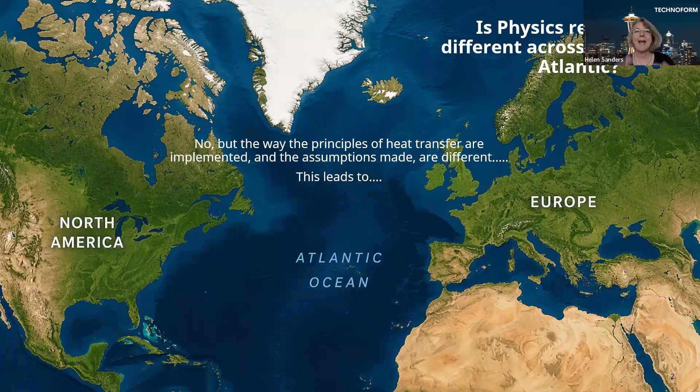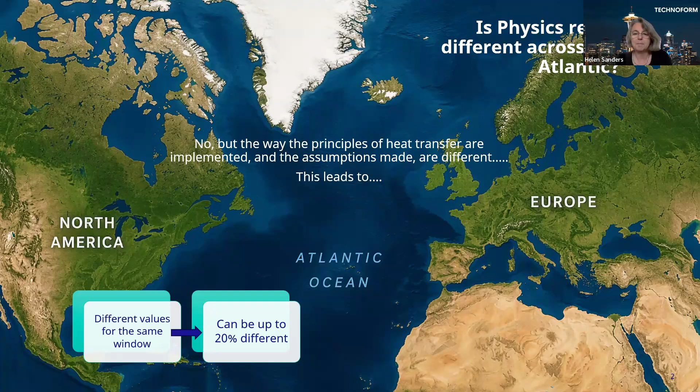But what we find is that the principles of heat transfer, how they're implemented, and the assumptions made are different in North America compared with Europe. And what this leads to is different values for U factor for the same window if calculated in European terms versus North American terms. And it can be up to a 20% difference. It's quite meaningful. And we actually find that there's no correlation between the North American U factors that we calculate and the European calculated U factors. So there's no quick rules of thumb.

So what I wanted to do here today is explain to you the reasons for the differences, then talk about some of the implications that arise from that. And then at the end, give you some rules of thumb, or questions to ask when faced with U factors for windows, so that you can really figure out whether you can do comparisons between windows or not.

So with that said, let's take a dive into why the U factors are different in Europe compared with North America. There's four main reasons. One is there's a different approach taken to doing the calculation. Secondly, the calculation methods are different. And then they use different boundary conditions, which I'll talk about in a moment. And then they have different window size assumptions.

So let's talk a little bit about the different approaches for the calculation of U factor. In North America, we're really just considering the assembly U factor. Most of the U factors we talk about are just the assembly U factor. It's standardized based on particular model sizes. The industry compares performance based on the assembly only, and that's our paradigm in North America. And it can be challenging for energy simulations, because you really want to use project-specific sizes for that, and we only generate U factors based on a model size.

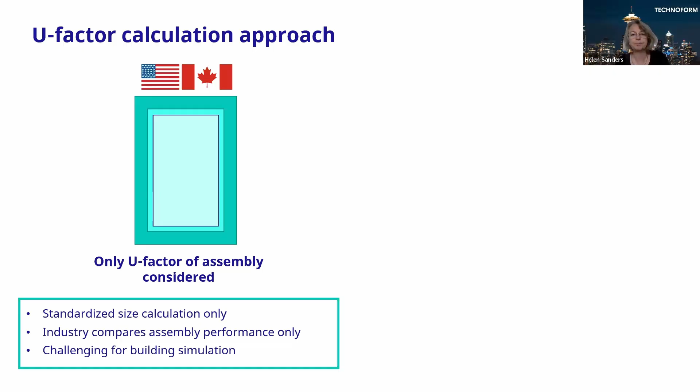In Europe, the situation is different. They calculate U factors for the frame separately from the center of glass, and they also calculate a performance for the edge as well. What that does is it allows you to calculate an overall assembly U factor as a function of the particular project size, and scale the performance for size.

Helen, sorry, I hate to stop you, but I'm being told there's an echo. Oh, I'm sorry, I don't know where it's coming from. I'm not hearing it. So is anybody else getting an echo here? No, I'm not hearing it on my end. It's clear to me. Amber, it says all of us are echoing. I don't hear it, so I don't know how to fix it. Sometimes Zoom decides to use two speakers instead of only one. So maybe look in the audio button on the left, Amber. It'll probably tell you which speakers are being used. Yeah, let's see here. Do you want me to try something? Okay, Vito says it stopped. So it was more than one. Amber, how about yours? Is it still?

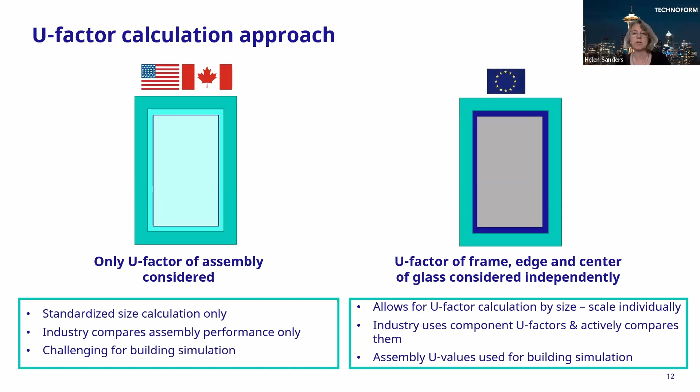So just to dig in a little bit, the North American U factor is calculated by an area weighting. You calculate a frame U factor, multiply it by the area of the frame, then add it to an edge of glass U factor multiplied by the edge of glass area. That edge of glass area is defined as a 2.5-inch strip around the perimeter of the window just inside the sight line. Then you add the center of glass U factor multiplied by the center of glass area, which is basically the glass area minus that perimeter edge of glass area.

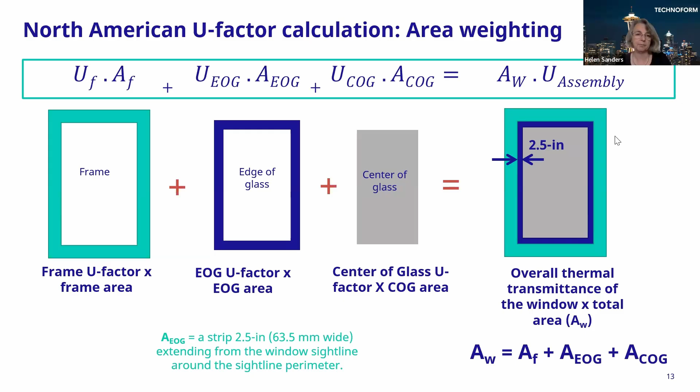Once you do that, the sum is equal to the U factor of the assembly multiplied by its area, and then you get your U factor. It's simple. The European calculation is a little different.

Instead of an edge of glass U factor, it uses this concept called linear thermal transmittance, or psi value, where it assigns a thermal bridge value, linear thermal transmittance, to the conductance caused by the glass-frame interface. It doesn't assign an area to that, it's just a linear length. So it's basically this linear transmittance multiplied by the interface length of glass to frame, and that gives you the transmittance caused by the edge of glass.

The frame U factor times the frame area, the center of glass multiplied by the full glass area. Then you add all that together and it gets you the overall transmittance of the window. So it's a little different calculation, and that little difference actually gives rise to some big differences in the outcome.

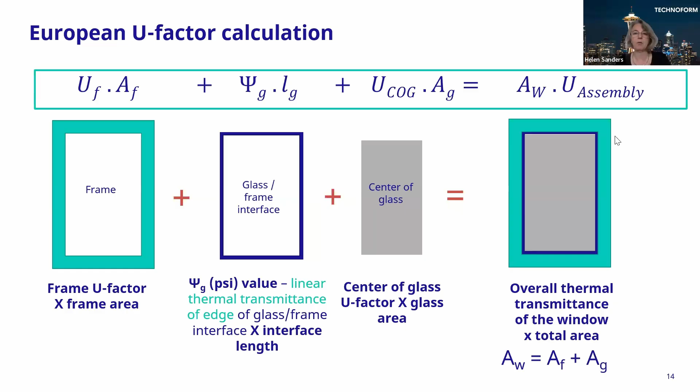Before we go on to some of the other differences, what I want to talk about briefly is that the implication in both European and North American U factors is that you really have to clarify what the U factor you're looking at is for. A lot of people talk about the center of glass U factor, and they get that mixed up with the whole assembly U factor.

But the frame U factor and the edge of glass U factor are typically higher or worse than the center of glass U factor. So when you do the area-weighted average, the assembly U factor is typically always higher than the center of glass. So bad things can happen when you mix up that lower or better center of glass U factor with the assembly U factor. And here's a brief example.

This is an example of a building simulation done on the perimeter zone, a little perimeter zone model, based on the Minneapolis climate zone with a 70% window to wall ratio. We simulated the perimeter zone assuming the center of glass U factor was mixed up and used instead of the whole fenestration U factor. In this case, the center of glass U factor was about 0.3 in IP units, compared to the whole fenestration assembly U factor of 0.45, so quite a considerable difference.

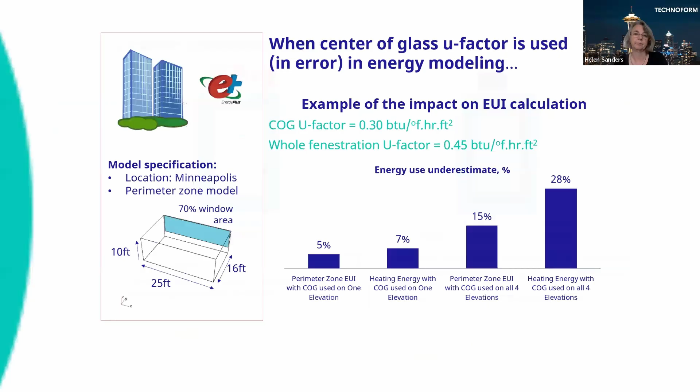So that's one reason why the European and the US and Canadian U factors are different, because we have a different approach. But also the calculation methods are different, and it all stems from the parent or the mother ISO standard, which is ISO 15099. And it is a standard that tells you how to calculate the thermal performance of windows. And it gives you 2 approaches.

It gives you basically the North American approach, which is the area weighted method, or it allows you to do the linear transmittance method, which is basically the European method. So you have 2 parallel methods. North America chooses the first and Europe chooses the second. And as a result, this is where a lot of the differences come from.

So the linear transmittance method, the European standard references that, and that's in the EN 10077-1 standard, and it also references a different calculation method for calculating the center of glass U factor and also the frame U factor. But basically, the biggest difference is that in the area weighted method, the frame U factor includes some of the heat transfer due to the spacer and the edge of glass, whereas in the linear transmittance method, the U factor of the frame doesn't. So even at the component level, you cannot compare a U factor calculated from the European method with a U factor calculated through the North American method.

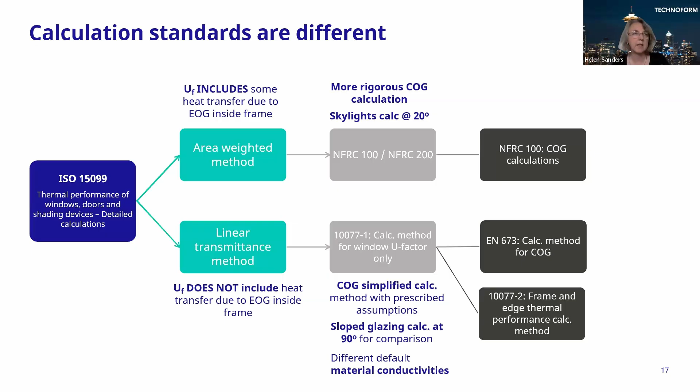What we find also is that NFRC 100 has a much more rigorous center of glass U factor calculation, and it also calculates skylights at an incline, whereas in contrast, the European method has a more simplified calculation method for center of glass U factor and uses the slope glazing at a 90-degree slope for comparison. It also has some different default material conductivities that you can see influencing the end result as well.

So calculation methods are different, approach is different, and one of the biggest influences are the boundary conditions. And what I mean by boundary conditions are the temperature assumptions and wind speed assumptions and all the assumptions relative to the climate. In North America, we have an outside assumed temperature of -18, whereas in Europe, it's 0, just freezing. So a much milder assumption for climate. The interior temperatures are pretty similar, one's at 21 and the other's at 20, but the delta T, the difference between inside and outside, is much, much higher for NFRC 100 versus the European standard. And that gives rise to some significant differences, just purely when we think about the boundary conditions themselves.

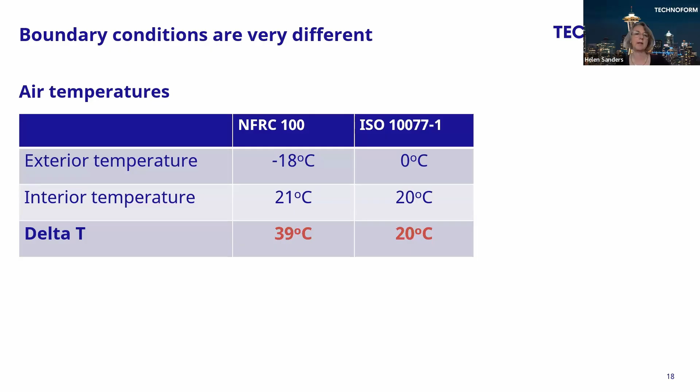Even if you use the NFRC calculation methodology and you change the air temperatures, you're going to see a big difference in U factor. The other thing that's different in the boundary conditions are what we call surface film coefficients. Just think of those as reflecting the conductance or resistance of the boundary layer that occurs between a solid surface and the adjacent air, and the heat transfer that occurs across that boundary. It occurs through convection and radiation, and it's influenced by the wind speed, the orientation of the surface, the slope of it, the temperature difference and the emissivity of the surface.

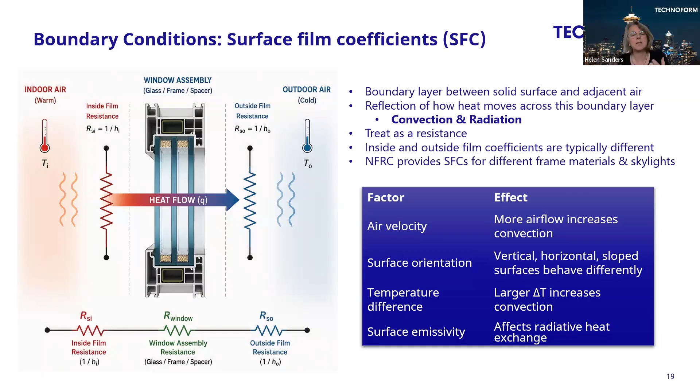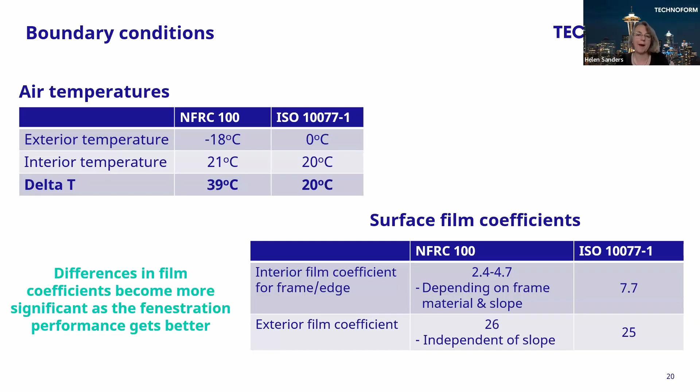And really, in simple terms, what we find is that the assumptions that NFRC uses are significantly different to the assumptions that ISO uses. What we find is that there's a range. NFRC uses a range depending on the frame material, on the slope, but ISO has less variation. The other thing to note is, as the fenestration performance gets better, the differences caused by the surface film coefficients increase. So you see differences becoming more apparent when you get better fenestration performance. So boundary conditions are huge.

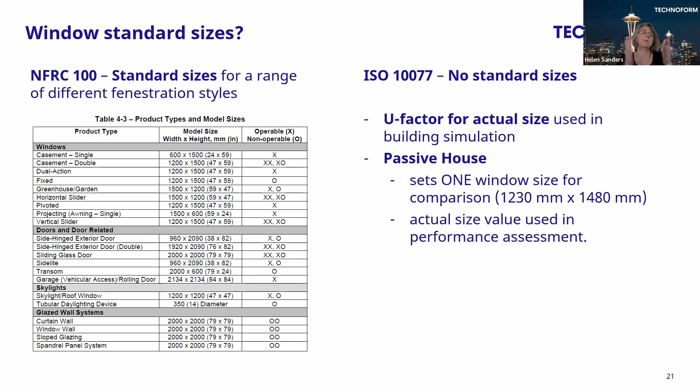The other difference is window size assumptions. So in NFRC, as you know, there's a huge list of different sizes for different windows. For the European standard, there's no standard size, and you typically calculate the U factor for the particular window size in question. Now, Passive House, which uses the European standard, does actually set one window size for comparison, but that window size is still not comparable with the NFRC sizes.

So lots of difference. I would refer you to a really, really very good review by RDH that they did for BC Housing. I put a link here in the presentation if you want to dig down deeper. But basically, there's lots of differences, and as Terry said, the devil's in the details. But the main takeaway is that you really can't compare European and North American U factors because they're just not the same. And the impacts are quite significant.

So I want to just take us to one of the key parts of window design, which is the optimum cavity dimension for an insulating glass unit. So heat transfer, or U factor, depends on the conduction across the cavity and the convection in the cavity. As you increase the cavity dimension, conduction goes down, which is great. You would think that U factor would go down. But as you continue to increase that cavity dimension, you start to build up convection currents. So then the heat transfer starts to increase.

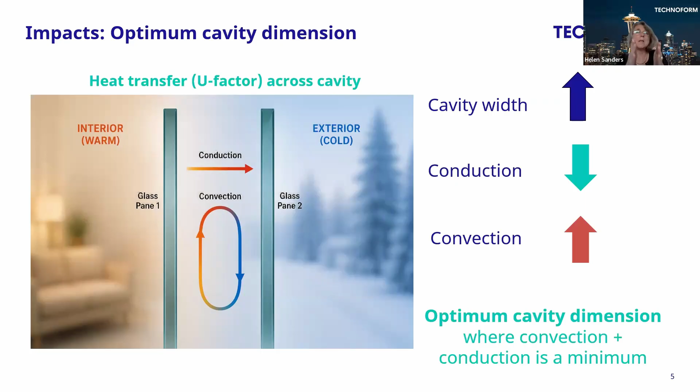So what happens is you end up with an optimum cavity dimension that optimizes the combination of conduction and convection. So there's this optimum or minimum U factor that occurs. And you know this, because in North America, we typically design all our windows around 12 to 13 millimeters, half an inch, because that's the optimum cavity dimension for air and argon.

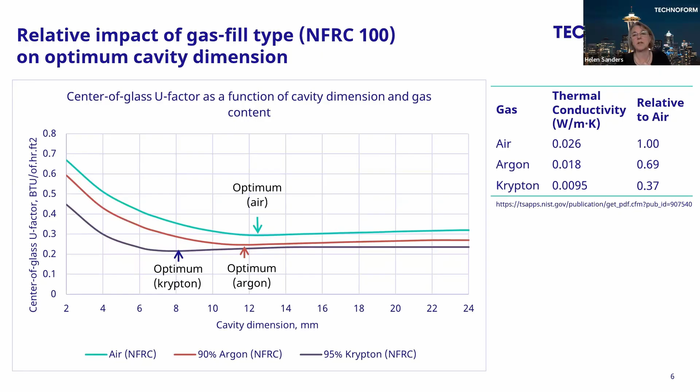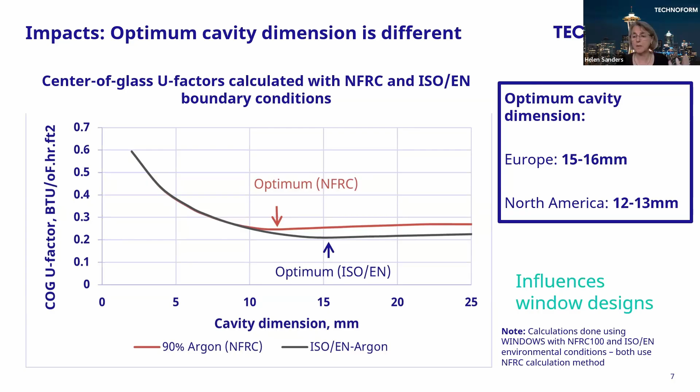So what we find is the two different calculation methods give different results for the same window. If you picked one window at one particular size and you used the European method and the North American method, you would get two completely different U factors. And they can be up to 20% difference. And the center of glass could be even more different than the assembly value. And that's even if you use the same window size.

So what that really means is, especially in Canada where you use metric U factor units, it's really important that you don't do a direct comparison between a European metric U factor and a North American metric U factor. They are not the same. And you can't change a European calculated U factor in watts per meter square Kelvin and turn it into an IP unit U factor and do a comparison with NFRC 100. It is just not possible.

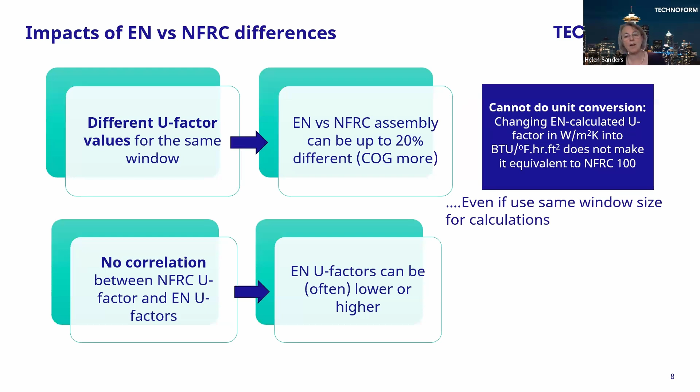Don't do it. There's also no rule of thumb that we can give you that correlates an NFRC U factor with the European U factor. European U factors can often be lower, but they can also be higher than the NFRC value as well. So there's no quick rule of thumb I can give you other than just don't compare them. It's not possible.

So I've just put on the screen here 5 questions that it's really important to ask about a U factor. If you're given a U factor from a customer, from a supplier, from anybody, ask these questions. So first of all, what is the U factor describing? Is it for the whole window assembly? Is it just for the center of glass? Is it for the frame? You really need to know what it's describing for you to understand the context and how to use it.

The other question, probably obvious, is what's the units? Are they watts per meter square Kelvin? Are they in IP units? And then what's the calculation standard that was used to generate it? Was it NFRC 100 or was it the EN ISO standard 10077? And what were the boundary conditions used? Were they NFRC winter boundary conditions? Or were they European boundary conditions? Because that, as you saw before, makes a big difference to the U factor outcome.

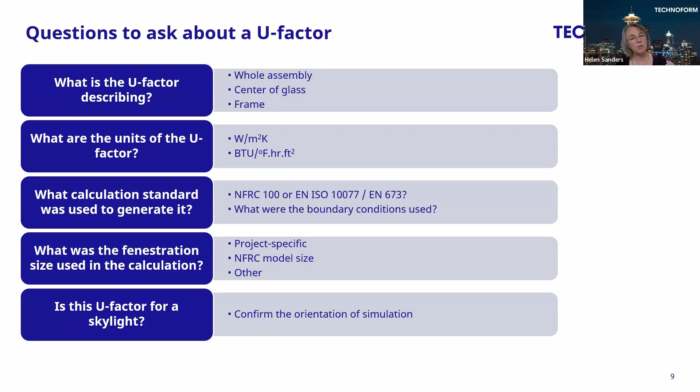And then just before we finish up here, there's some other important takeaways from the edge of the glass. So if you saw the calculation for the assembly U factor, it's pretty clear that the center of glass U factor is not in any way impacted by the edge of glass performance, because the definition takes it away from the edge of glass.

The spacer and the edge seal thermal performance in Europe impacts the psi value, that linear transmittance at the interface with the frame, and of course the U factor of the window, the assembly. In North America, the spacer and the edge seal impacts obviously the edge of glass U factor, but it also affects the frame U factor and of course the assembly U factor. So this is something to be aware of when you're looking across the Atlantic.

So the edge of glass U factor in North America depends on the spacer and the sealant, of course. It also depends on the IG makeup and the gas content and the frame bite.

The psi value, that linear transmittance, really depends on the frame interaction with the edge of glass. So it depends on the bite and the frame material, which in North America, the edge of glass does not depend on. And of course, it depends on the spacer and sealant and IG makeup, just like in North America. So be very clear that the psi value and the edge of glass U factor in North America are not equivalent, and you can't mix them up.

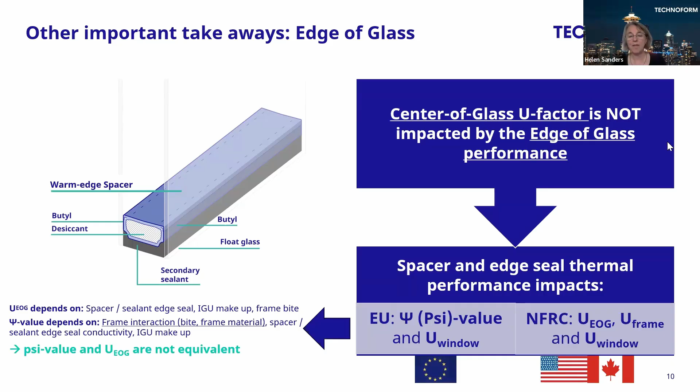And with that note, I'm going to finish up and answer the question: do the EU and North American windows speak a different language? And the answer is yes, they do. And translation is super hard. So proceed with caution. Don't do it.

Great. Thanks, Helen. So a couple of quick points. Whenever Helen said NFRC, you can insert CSA A440.2. They're essentially the same. Lots of Canadian manufacturers use the CSA program. And many, many times in my career, I had a salesman come to me and say, well, their casement window gets a 1.05 metric and we're at 1.5. How come? Well, center of glass values. So if the performance is way out of whack and the product is comparable, oftentimes that's your answer, they're being given a center of glass.

So I asked Adrian Edge to join us today. Adrian's our codes and regulatory director. Adrian's been doing a lot of work connecting to European entities. For instance, IFT Rosenheim is a standards organization in Europe, working on a lot of this kind of topic and questions about imported products and what it means when imported products come in with European standards. So first I'm going to give Adrian a couple of minutes to elaborate and ask any questions he has, and then we'll open it up to anybody else that has questions.